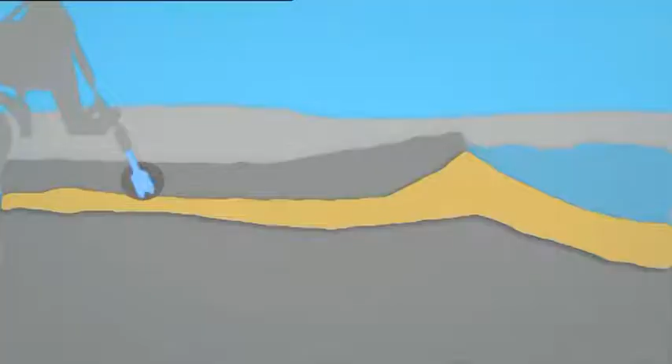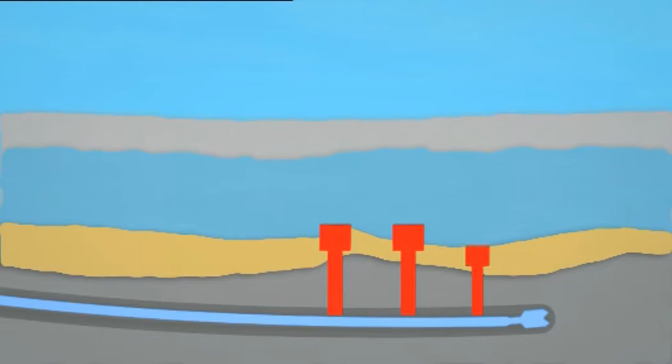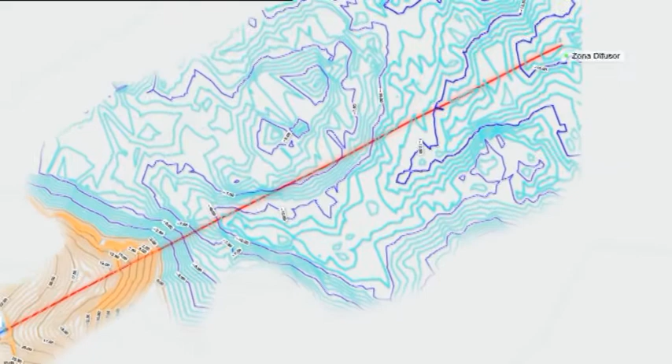The work consists of the construction of a pipeline which will carry water treated at the San Cibrao Wastewater Treatment Plant, WWTP, 700 meters offshore, and a diffuser that will complete the improvements to the sanitation network and the new San Cibrao Cervo Treatment Plant. The pipeline starts at the San Cibrao WWTP and is made up of an initial overland section and 2 subsea sections, a main section and a final diffuser section.

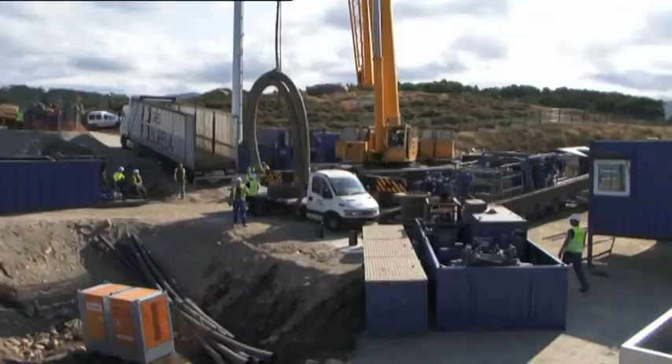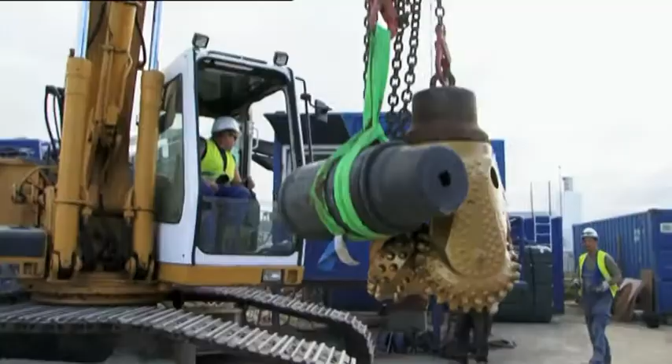The project plans specified the use of a traditional directional drilling technique using a drill guide for the 685 meters that made up the main section of the pipeline. However, at the proposal of Constructora San Jose and due to project deadlines and permits involved, the decision was taken to use an innovative full-section directional drilling technique. This technique consisted of full-section directional drilling, thereby eliminating the need for the drill guide procedure.

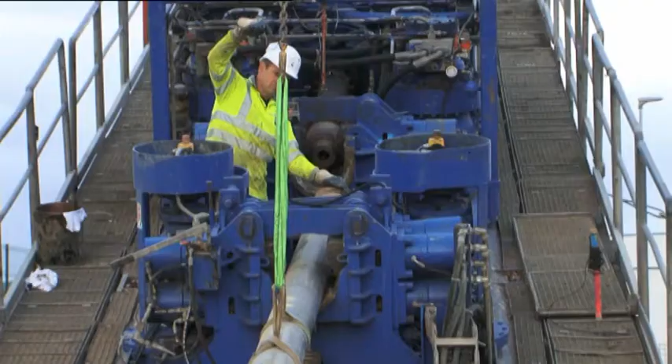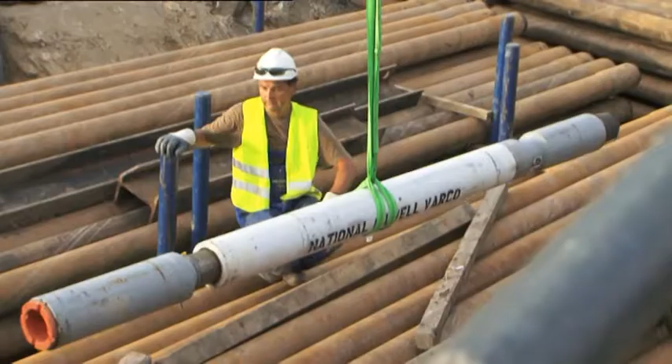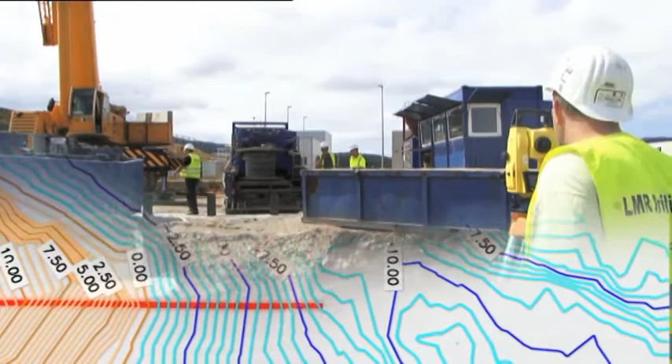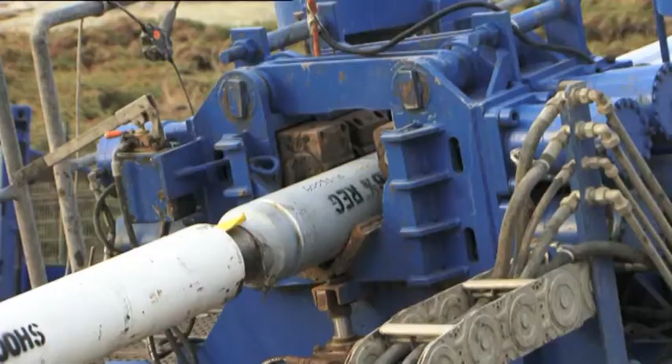This required a prior feasibility study in order to determine the degree of compatibility between the technology and the machinery involved and the site conditions. It was vital to ensure that drilling could be successfully carried out using this technique and to determine the optimum engineering solutions. The study therefore included geotechnical and geophysical tests, as well as terrain and the collection of topography and bathymetry data. In order to obtain the information necessary for the measuring processes, geodesic and topographic data were captured in the marine environment, bathymetry, and on land topography, using differential GPS for the bathymetry within the framework of the ED50 official Spanish datum.

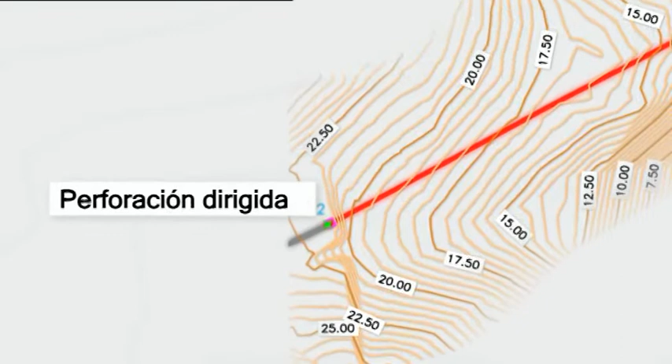The use of full-section directional drilling technology offers major advantages over traditional technologies. Lower risk of drilling fluid spillage into the sea during the process. Reduction in the volume of drilling fluid at the start point. Reduced risk of drilling rig rupture. Reduction in likelihood of drilling errors. Reduced environmental impact. Once the data capture process was completed and the feasibility plan had been approved, the full-section directional drilling process was carried out for the 685 meters of 315 millimeters polyethylene pipe.

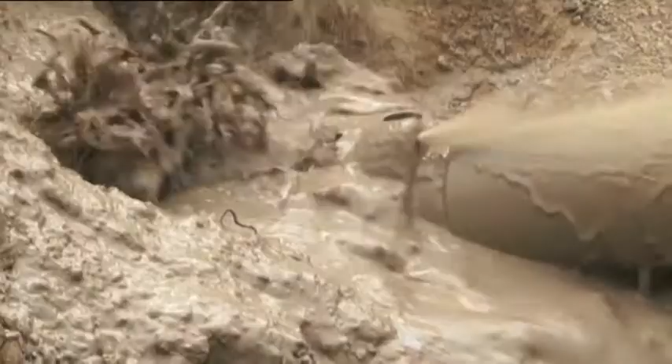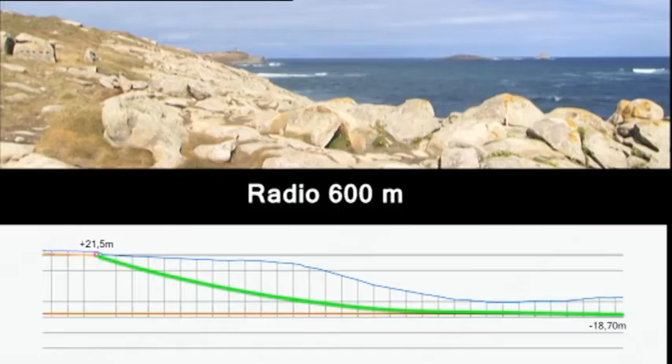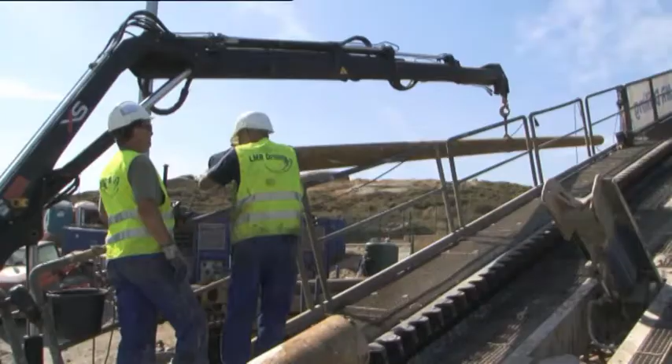The drilling gradient for the main section ranged from a height of plus 21.5 to minus 18.7 meters at the end of the diffuser section, with a 14 degrees angle of attack and a 1 degree gradient at the end of the pipeline. Both alignments are joined by a 600-meter radius curve. Drilling work for the entire 685-meter section was completed in just 10 days. Rig 3500.9 drilling equipment was used, weighing 63 tons and with a power of 3,500 kilonewtons. Bentonite drilling fluid was used during the process.

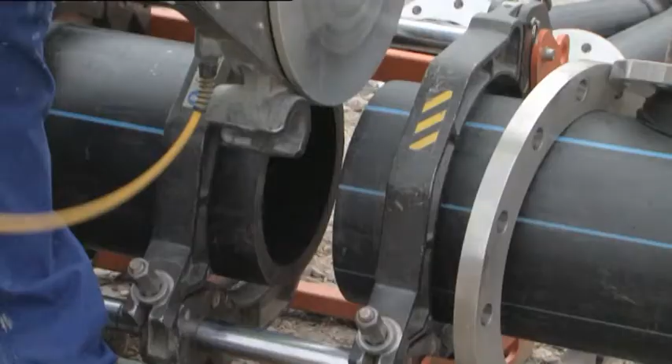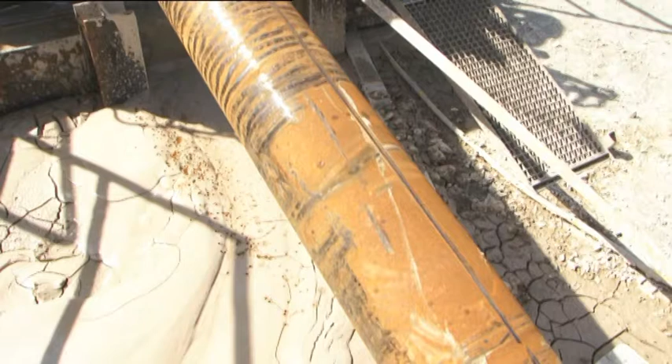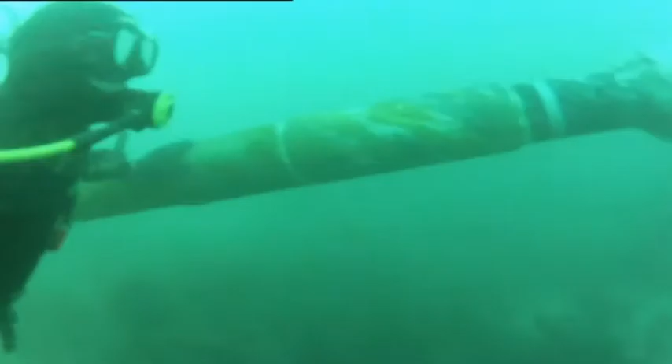Pre-assembly of the pipeline was carried out on the dockside belonging to the aluminium manufacturing company Alcoa in San Cibrao, where the pipeline sections were welded together. Once the drilling process was completed and the pipeline sections had been welded, the entire subsea section was raised and placed in the sea. A vessel was used to tow the pipeline from the dock to the laying point. This process was carried out overnight in accordance with the terms and conditions of the license issued by the Port Authority and in order not to interrupt sea traffic. Once the pipeline reached the borehole start point, it was laid on the seabed using the pipeline filling. The pipe was tipped, enabling it to hook onto the reamer head and was then inserted into the completed borehole.

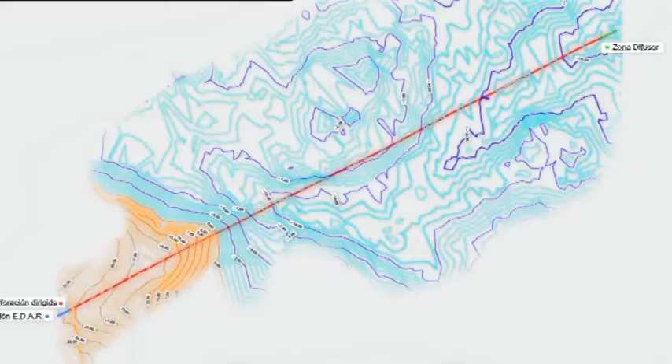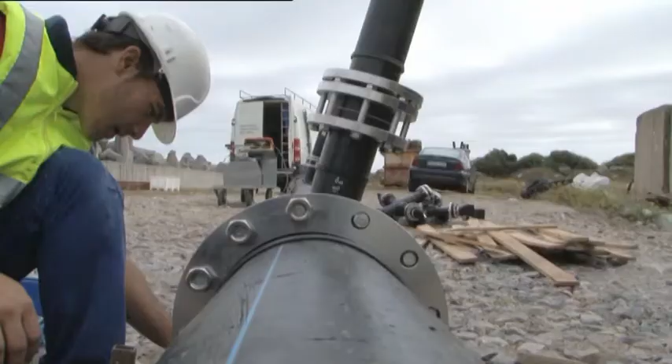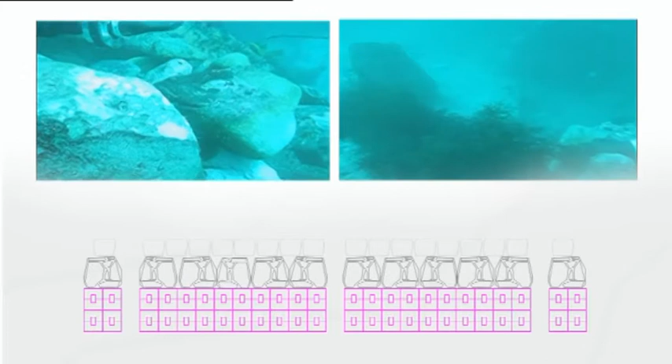Once the pipeline was laid, the connection was completed with a concrete casing between the wastewater treatment plant and the pipeline. The final phase consisted of the construction of the pipeline terminal, consisting of a 14-meter-long diffuser pipe with 3 riser pipes. The trench was excavated using rammer hammers for the pre-excavation work and underwater blasting on the seabed. The diffuser section was also pre-assembled on the Alcoa dockside. In order to protect the diffuser section, a layer of prefabricated concrete ballasts were used and the seabed was levelled off with riprap in order to ensure the regeneration of the zone's ecosystem.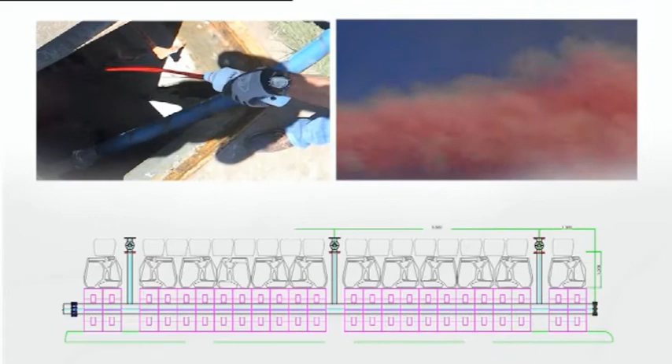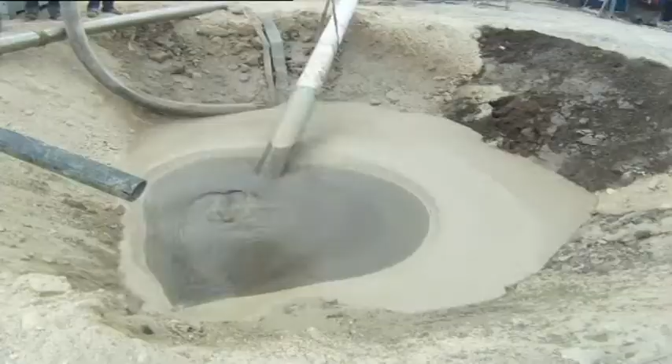Prior to the start of operations, a test was carried out using colouring to ensure that it was working correctly. The use of this technology offers major advantages over traditional methods, allowing for deadlines to be met whilst at the same time complying fully with safety standards and ensuring correct geometric positioning, as well as minimizing the impact on the environment. The technical complexity involved, the use of cutting-edge technology, and a deep concern for the environment have once again positioned Constructora San Jose at the forefront of the civil engineering sector.